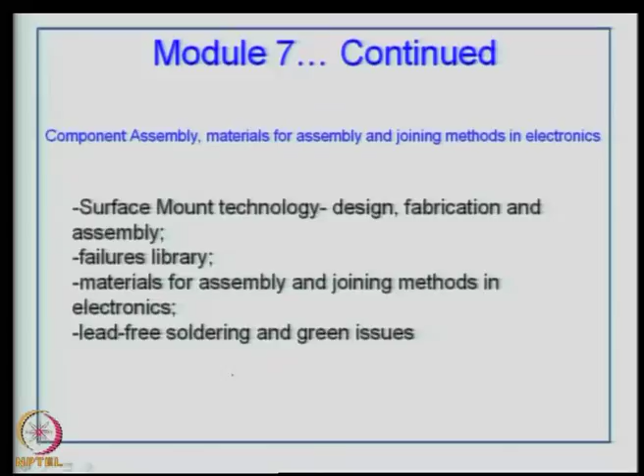So we will continue with module 7 of this electronic systems packaging course. As you are aware, in module 7 the focus is on component assembly. The component can be a through hole, a surface mount device, or an advanced package like a BGA, a CSP, or a flip chip.

Flip chip on board is considered a very advanced form of connection, although flip chip is in itself a first level interconnection choice. In this chapter, we are looking at materials used for assembly purposes. Typically, the focus is on solder alloy that is used for joining components on the board.

This becomes very important because joint failures have been seen in many design and assembly issues. The reason could be the joining material, that is the alloy, or the nature of the substrate, the nature of the component lead, whether it is a surface mount device or a through hole component, and so on. The failures could also be due to the soldering or joining conditions, whether it is manual or equipment based, machine based operations.

Remember, in this course we are trying to teach you how you can do these joining methods in your lab in a prototyping unit, but at the same time we are also looking at issues in terms of reliability, in terms of failures that can be seen in large volume production.

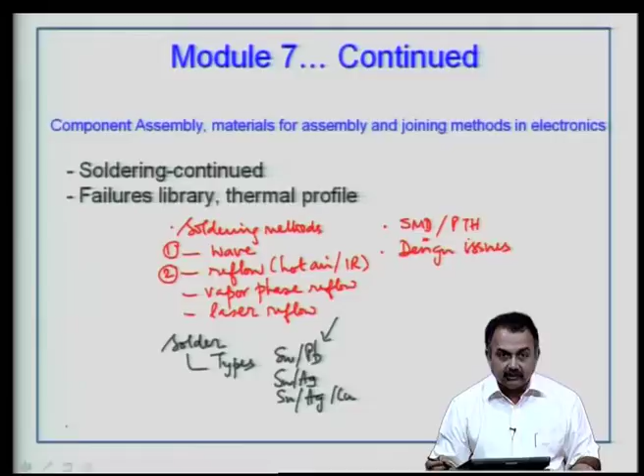Today we are going to talk about vapor phase reflow soldering process. This is a very good technique to avoid heat shocks. This could be considered as an alternative to IR reflow or hot air, that is convection based hot air reflow processes.

Now remember, I keep emphasizing in this particular module that when you do an assembly where you have a surface mount device that needs to be mounted on a substrate, you need to know the nature of the components that can experience heat shock, thermal shock during the assembly processes.

For that, you need to look into the data sheet of the component, and they would have specified that the component in some cases can experience a thermal shock, and therefore it is not recommended to expose that component above a particular temperature for a certain period of time. So that information needs to be gathered by the designer as well as implemented by the assembly personnel.

Now, in IR reflow or hot air reflow, the thermal profile has been set and you reach a peak temperature at which the solder melts, reflows, and then attaches itself to the component lead. Now in this scenario, there are various components on the board, and different components will experience different thermal shocks, because the materials for each of these components can be different.

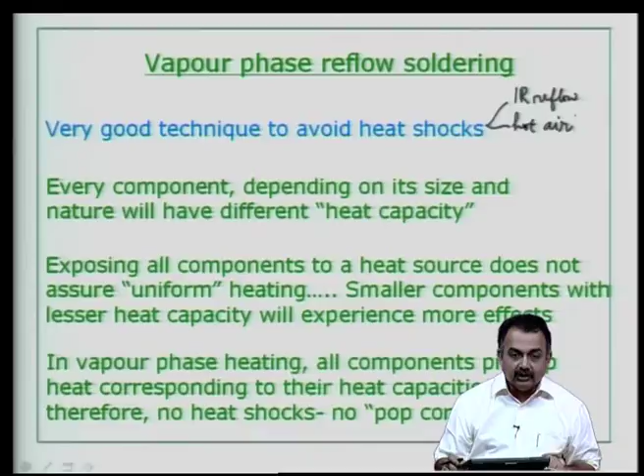Vapor phase reflow is a very good technique, because in vapor phase reflow soldering process, all the components pick up heat corresponding to their heat capacities, and therefore there are no heat shocks. This we call the popcorning effect, as you can see here, the term popcorning effect is used. Now what does a popcorning effect mean?

If you take a BGA component, for example, and if it is a plastic component, basically the plastic material used is epoxy, and epoxy is known to absorb some kind of moisture. Therefore, some manufacturers of packages generally recommend that you preheat the BGA package before it goes for assembly, to remove the moisture. What happens if you do not remove the moisture and if you expose it to reflow soldering?

For example, this is a BGA package. Now what I am drawing here is the solder ball, the ball grid array, and this is the substrate. Let us say this is an FR4 substrate, and then you have the die. So this is the cross section of a BGA package. Now there will be inherent moisture because of the nature of the epoxy material.

A sudden thermal shock means you do not expect that there is so much moisture entrapped. Now, if you set a wrong thermal profile, the moisture will evaporate or be removed from this area, that is the FR4 epoxy area, and then the solder ball area, there is entrapment of moisture. So this thermal profile will make this moisture burst out in the form of gases, and this will cause delamination.

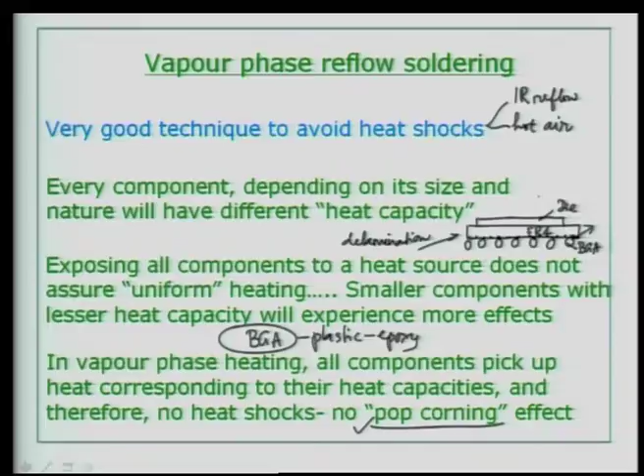So a popcorning effect means you can literally see it if you carefully observe through a video camera when you do a reflow soldering process in a package in which you are sure there is moisture. You can see the separation of the solder balls from the FR4 substrate. If you do not notice it, you will see failures, and you have to replace this package. Therefore, popcorning effect is an inherent problem in BGA soldering, especially in plastic packages. So based on the plastic material used, the encapsulant or the organic substrate, it is better to preheat and prepare this package for reflow soldering instead of directly using it from its normal storage position.

Now let us describe what is vapor phase soldering. It is used only for surface mount devices, and here typically, as you can see in this figure, there is a container, and then you have the organic solvent. Basically you are going to use an organic solvent. The organic solvent that is used is perfluoropolyether, PFPE.

Now the organic solvent will be heated at a particular temperature where it can boil, so that you get the vapors. You can see here these are the vapors. Now your board, which is picked and placed using a machine pick and place process using solder paste, so that it is tacky cured and the components are in place, is slowly introduced into the working chamber where the vapors are ready.

Now the vapors will be in contact with your printed circuit board, and based on the heat capacities of the components, sufficient heat will be absorbed by the components. For example, PFPE boils at 230 degrees centigrade. Now suppose you are using a solder alloy with a melting point of around 220 degrees centigrade, so you have a window of plus 10 degrees centigrade. The reflow process takes place and all your components are attached during this reflow process.

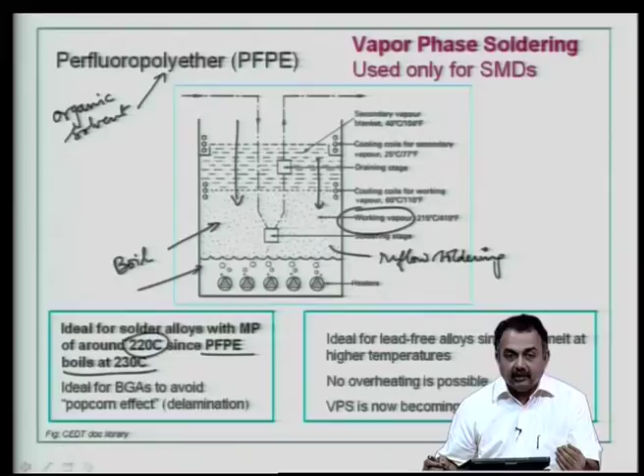So, you have a condenser that is usually present in this, so that it condenses quickly back and again it is heated, and therefore, you get a constant area, sufficient area that is available for the vapor to reflow the solder paste material and enable the reflow soldering process. This is very ideal for BGAs to avoid the popcorn effect.

So, the printed circuit board assembly process can be done for a few boards depending on the area of the chamber, and the reason why we say this is ideal for BGAs is because you can work at temperatures that are not detrimental to the substrate and the solder ball attachment.

Now, this process is ideal for lead free alloys, since they melt at higher temperatures. Therefore, you can fix the entire process at 230 C, and most lead free alloys have melting points around or less than 230 C, and therefore, you have a very ideal situation for working with lead free alloy solder paste.

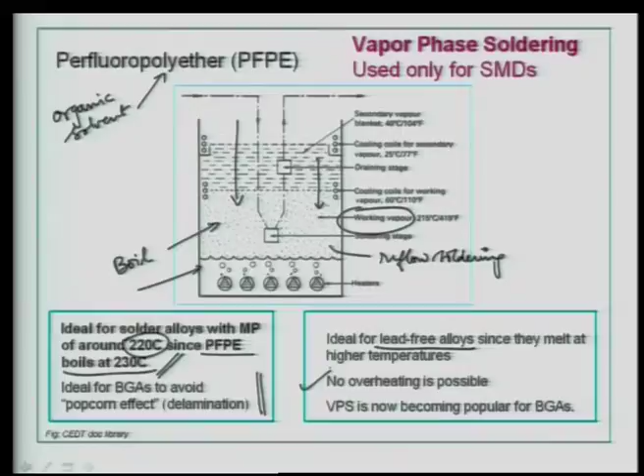Now, there is absolutely no issue of overheating, which is always possible with the IR or hot air reflow soldering process. That is why we have to work with the thermal profile, which we are going to discuss later today, how sometimes even with the best thermal profile you do not get a very good joint.

But vapor phase soldering is catching up very fast. It is being tried for mass production, and therefore, this is a very good alternative for IR or hot air. In fact, IR is much below in terms of choice compared to convection based hot air reflow soldering.

So, this is an ideal situation. This can be used for prototyping, and we are simply using the basic concept that various materials have different heat capacities, and that could be used for transferring heat from the vapor to the component and thereby to the lead and the solder paste to get a very good wet joint.

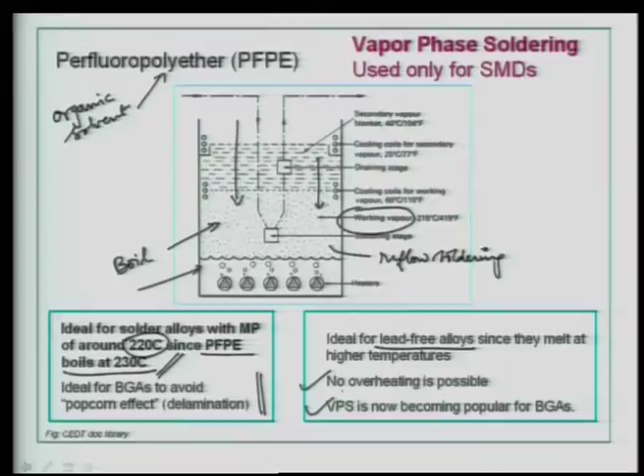Now, having seen all the reflow processes, let us look at an issue: whether we have to really clean the board after assembly. Is cleaning really necessary? Yes, because as we know, flux is being used in the solder paste. It is corrosive, and we have to use flux because we have seen the need for using flux.

A long term contact will lead to corrosion. Although flux is used to remove oxides and clean up the copper pads, residues of flux after the reflow process can lead to deposit of various byproducts, which in the long term will lead to corrosion at the joints. So, you can have joint failure caused by flux residues.

Therefore, you can clean the board after assembly. It is a major step because let's say after 1 year or 2 years, if the board is analyzed and there has been a problem due to shorting of tracks, or shorting of a track caused by debris due to flux and a nearby joint which is also affected due to formation of an electrochemical cell, these kind of issues can be expected if the board is not cleaned.

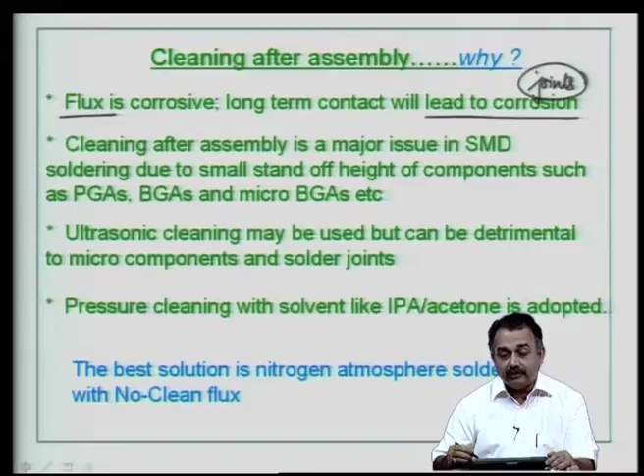So, cleaning after assembly is a major issue, and especially when you are using small standoff height components, that means low profile components, you can't really find out if there is a flux residue under the component, especially in a BGA. This is the board. So, you can expect, because this is a large area package, after reflow soldering you really do not know the kind of contamination that has taken place under the BGA package.

It could be even in the case of a surface mount chip capacitor. So, we are really concerned about contamination under the package.

Sometimes it is possible to easily remove the contaminants outside of the package area on the board. Ultrasonic cleaning can be used, but sometimes ultrasonic cleaning for a long time could be detrimental because it could affect the micro components, small components and the solder joints due to vibrational shock. Therefore, although this is a suggested method, people would love to use pressure cleaning with solvent like isopropyl alcohol or acetone. In fact, an IPA mixture with water is also adopted.

So, cleaning after assembly is crucial. The only question is how do you clean it so that your newly formed joints are not affected, especially by ultrasonic cleaning - there again the timing is very important. The best solution is working with nitrogen atmosphere. Many people have been using the reflow soldering process in nitrogen rather than in air. So, this could be considered as an option to air reflow.

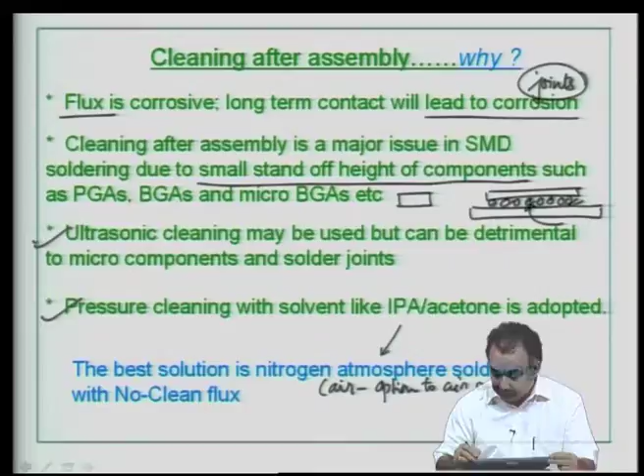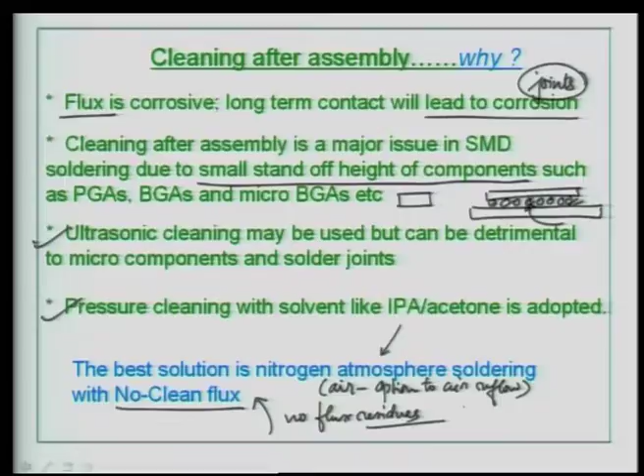And also using no clean flux. We have seen when we discussed flux materials that there is a material known as no clean flux. If you look at the data sheet of no clean flux, it says that if you operate the reflow process at a certain temperature, it is guaranteed that there will be no flux residues. So typically you do not have to clean the board at all when you use a no clean flux, but no clean flux could be expensive.

Now we look at some design for manufacturing issues. Having seen all the processes, these couple of points that I am going to discuss could go a long way in increasing the yield in large volume manufacturing.

For example, if you are mounting surface mount devices, and if you have the components placed at random, like this in one direction and this in another direction, the placement machines will lose speed if you work with different angles. So it is better to maintain either this state or this state, depending on the population of smaller or larger components on the board. It also helps in testing and assembly, because you can expect tall components' shadow not affecting the smaller components. So the longitudinal axis of all components should either be parallel or perpendicular. This is a design issue.

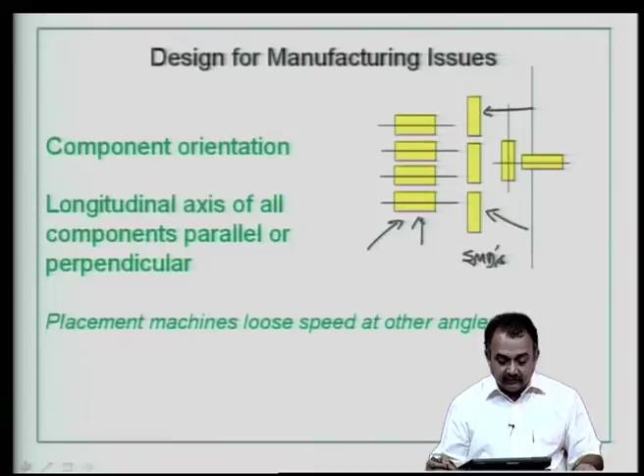Now, if you look at clearance between components, again we are talking about placement machine clearance. In some cases, the placement machines hold components either by vacuum pens or claws, and that requires a lot of space, especially for a tall component. Therefore you have to give a gap between tall components, and it is not advisable to place any components in that gap. So look at the kind of equipment you have, look at the type of component you are using, and look at what clearance you can give between components.

So that repair and rework can also be easily done. There could be situations when you want to remove a component, and you will have to use special vacuum tools to pull out the component and heat only that particular component for desoldering. So therefore, give a clearance of, say, 100 mils minimum, and it becomes easy for placing or for repairing and desoldering.

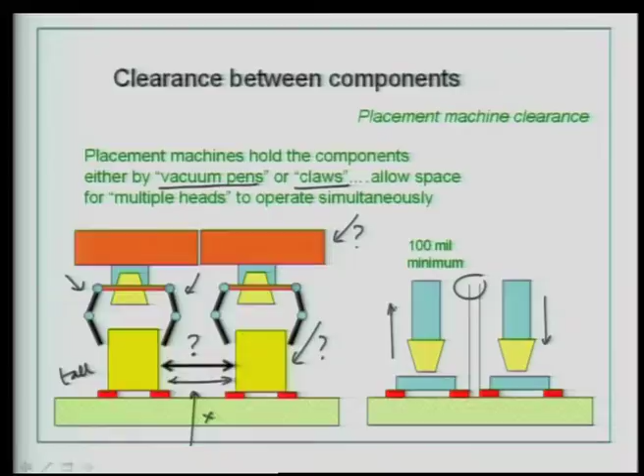There are a couple of points again that we will discuss before we go further. Considerations as a designer for good soldering: good clearance between the footprints. Now this is a footprint of one device, this is another one. Now you look at the distance between the two. Is it sufficient for a package like this?

Look at the placement. Assume this is placed at the center of the footprint initially. Now, after reflow, if the solder paste volume is going to be larger than required, you can expect, because of the large pad area that you have provided, the component can swim closer to the next component, resulting in a short. So look at footprint size, that is, footprint area calculation is very important.

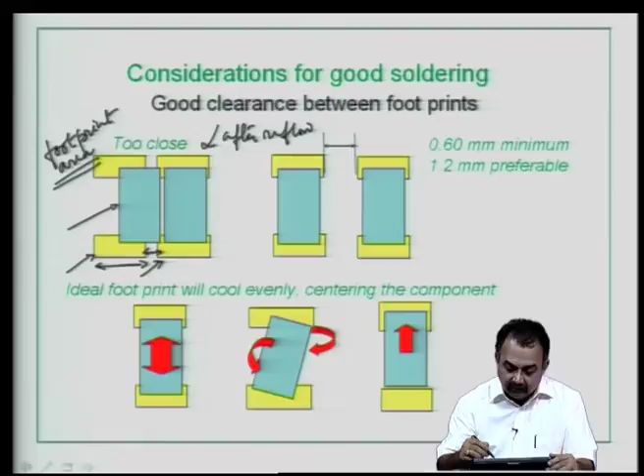Do not use footprints that are available in the library for all types of devices, that is, your chip capacitors. You can modify or edit the component footprint and reduce the size if required for a particular component of your choice. Now similarly, this distance, that is the width, is also very important. You do not want the component to move away from this pad, and sometimes the situation is that the component can swim to one side, resulting in no contact on the other side. So clearances between footprints are very important, and the area of the footprint is very important.

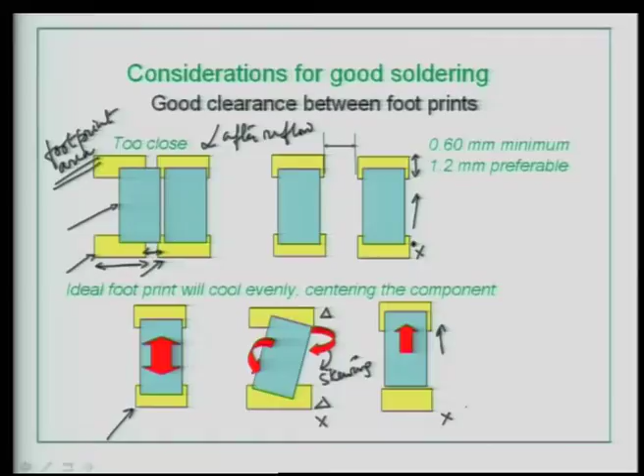Ideal footprint will cool evenly when you do the reflow, centering the component. Although we expect self alignment due to surface tension of the solder alloy, yet this is an ideal case. In some cases, if the solder paste is too much or if the temperatures are uneven, then you can expect this kind of skewing effect, or as I said, it could move to one side. So these are situations that you really want to avoid during reflow soldering of chip capacitors or chip resistors. These are all very small points that you can implement at your design stage itself.

Now, as a summary, we will look at writing down the soldering steps for a BGA. We have seen the various process mechanisms by which you can attach a BGA. So I will just list the typical BGA soldering steps. First, pre-bake the component if required, to remove the moisture. The reason is you want to avoid the popcorning effect.

Dispense the solder paste on the PCB footprints. In some cases, no solder paste is used, and the BGA solder balls reflow and join to the substrate directly. In this case, you must have equipment that can hold the BGA in place. If you do not have such equipment, you should use a small volume of solder paste, which contains an adhesive that can hold your BGA until it goes into the reflow oven. So, these are the two important steps.

Now you place the BGA package and align it carefully using some kind of fiducial on the board, or if you have equipment, your CAD data can help.

Now, at room temperature, you can tacky cure if you have used solder paste. This is recommended because your glue will now hold to the BGA solder balls.

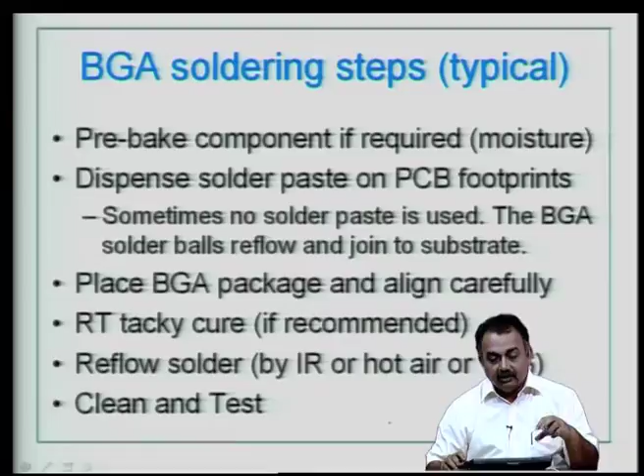Now, there is always a possibility that a BGA can be defective. If you look at the X-ray after the attachment process of a BGA is over, you could see that some of the solder joints have not been attached. There could be a dry solder joint, or there could be flux or solder paste in excess on certain sites under the BGA, which could result in shorting.

So, when you have such a situation, you might have to rework, that is, pull out the BGA, desolder it, and attach a new BGA after repairing the board as well as the BGA backside, that is the solder ball side. This is known as repair and rework. So, let us see how this is done.

The first thing is to apply liquid solder flux on the sides of the package. Imagine a BGA flip chip on one side, and on the other side you have the solder balls which have been removed.

Now, how do you remove the solder balls? You can apply hot air and use vacuum to remove the material, then clean up the area with isopropyl alcohol or acetone to keep it free from residues from the previous grid that you had.

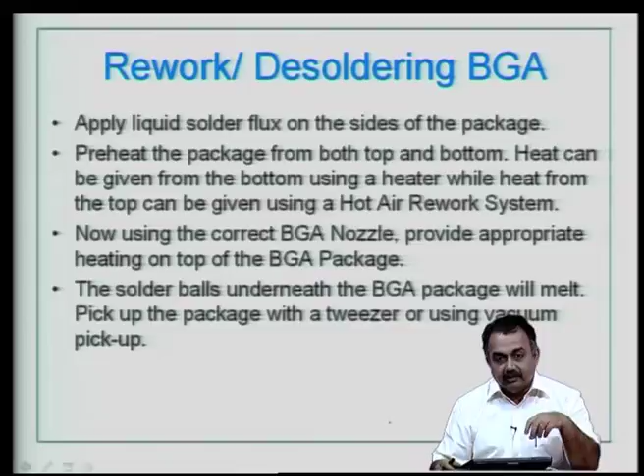Now, using the correct BGA nozzle, provide appropriate heating on top of the BGA package, because you do not want to affect the other areas. The solder balls underneath the BGA package will melt. Now, pick the package with a tweezer or using a vacuum pickup.

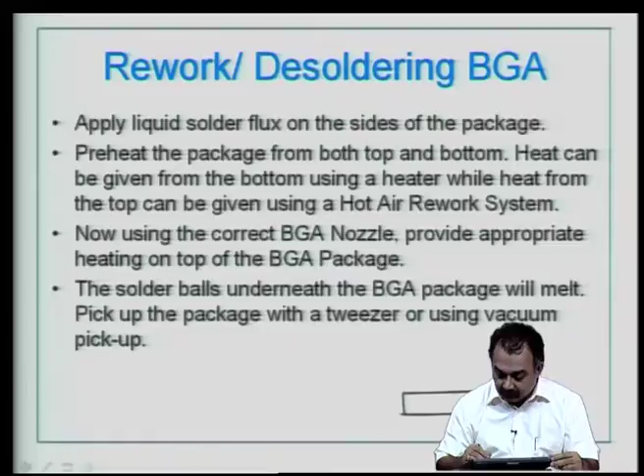Now, this applies to both. Suppose there is a board and there is a BGA package. So this is the BGA package, this is your FR4. Now, this is to be repaired. So what basically you can do is apply a hot air nozzle around the BGA package, on top of the BGA package totally, and then remove it.

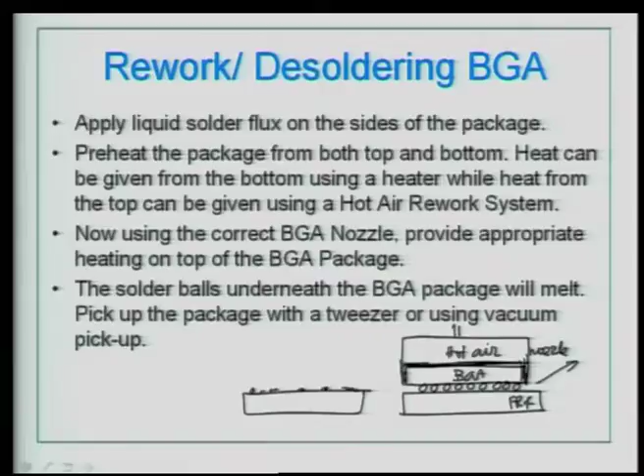So, when you remove it, what you get is on the PCB, those pads will be having some debris of the solder ball, and the BGA package, if I show you the top side, will also be non-uniform, because you have tried to remove the BGA from the board. So now you have to repair the BGA, you also have to repair the board bonding sites, and only then can you go for a new reballing process.

This is a task that everybody working in hardware, board design and assembly needs to be aware of today, because we are using a lot of BGAs. I will now show you a video about BGA ball desoldering. This has been done at the CEDT packaging lab, and I will explain the process steps as we go.

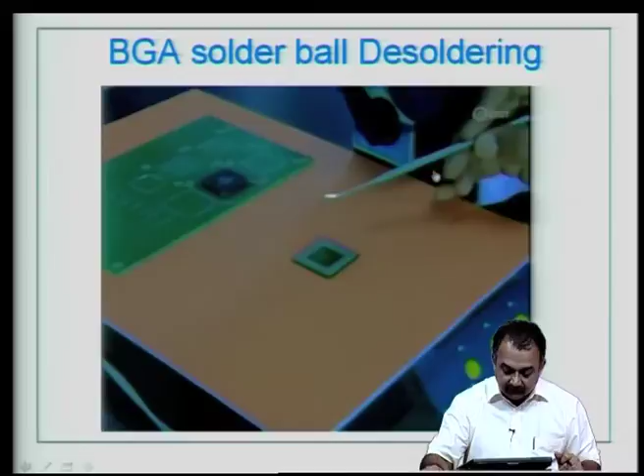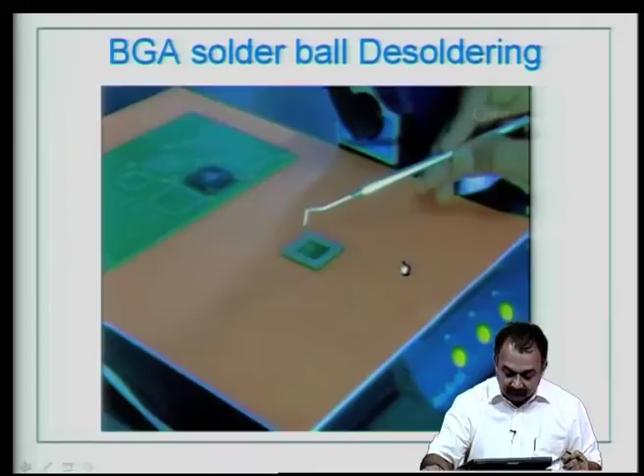What you are seeing is a BGA package. Now assume there are a few bad interconnects and you want to pull out the solder balls from those areas. We will now show you how to remove the defective solder balls, but in this video, irrespective of whether it is defective or not, we are going to remove all the solder balls, assuming there are a lot of defects.

So basically what we are trying to do is hold the BGA package firmly on a frame. Now there is a hot air nozzle. You apply hot air at appropriate temperatures suitable for the FR4 substrate, to melt the solder alloy you are using, so you need knowledge of that. Then you have the vacuum pickup of the molten solder.

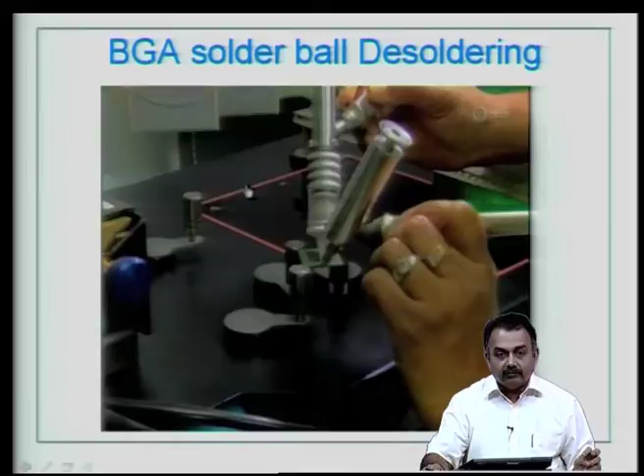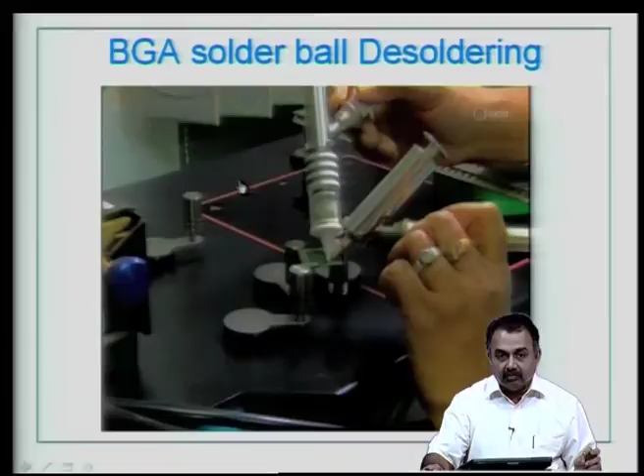So what you are seeing now is hot air being blown, and simultaneously we quickly remove the molten solder by a vacuum syringe technique. In this way, very carefully, without affecting the board surface, you remove the solder balls from the entire area you need to rework.

Now remember, in a BGA you can work on smaller areas. You need not remove everything unless all the BGA balls are damaged. In that case, you have to remove the entire solder ball.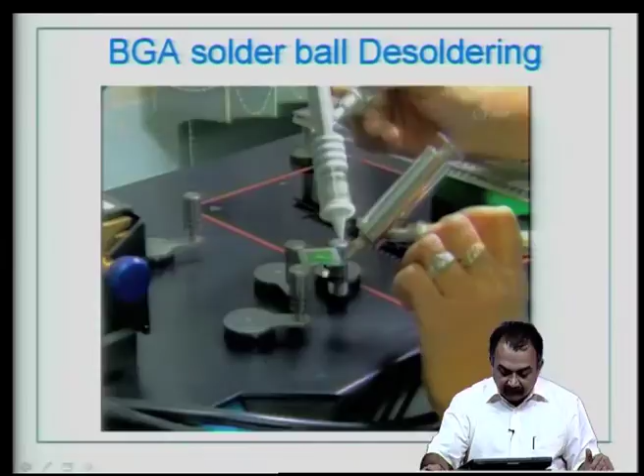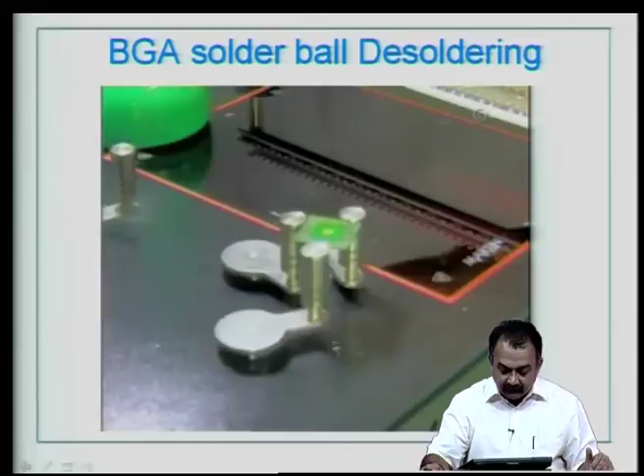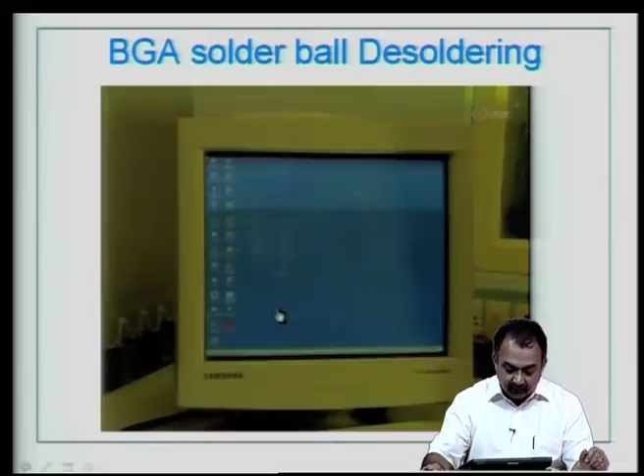So you can see these areas have been removed of the solder ball, and what you are seeing is the exposed pad on the printed circuit board. Now you can see the entire BGA surface has been removed of the solder ball. This is the best technique - you have to do it manually if you want good performance, and to make sure your substrate is not affected. You can use the same chip after reballing the package with new solder balls.

Currently, for this technique there is no typical automation, because you want to carefully look at every package for the desoldering and the reballing process.

Now let us look at how we do a BGA reballing. Once the balls from the BGA package are removed, clean the pad, as I said before, with appropriate solvent, and remove excess solder from the board. So your package is cleaned and your board is also cleaned.

Now apply flux paste or cream onto the pad. Paste or cream flux will help solder balls stick, instead of using a thin flux liquid, so that they do not fall or change position when the solder balls are attached.

Place the new solder balls very carefully on the pad using some kind of stencil that matches the ball diameter you intended to have. That information is very crucial - you can't use any ball size. You must have an idea of what the original ball size was, because you are working on a definite pitch, and different ball diameters will affect the pitch of the component.

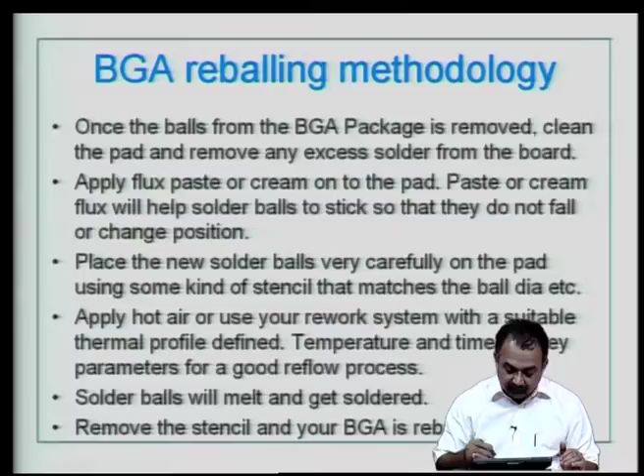So temperature and time are very important here. For a good reflow process, you have to work on these issues. Again, temperature, time, knowledge of the solder material, and knowledge of the substrate - that is, the glass transition of the substrate - are all essential information.

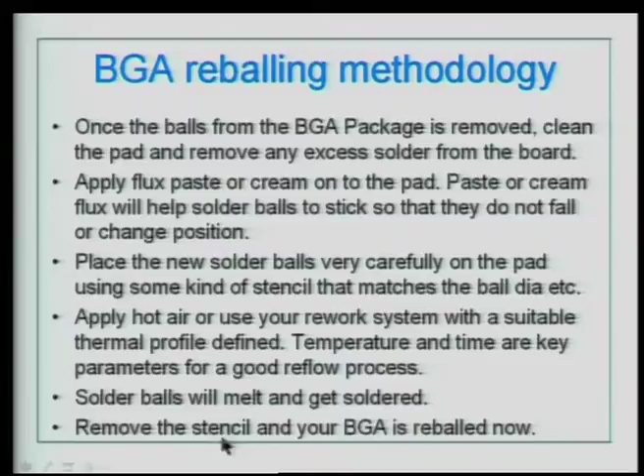Solder balls will melt and get soldered, and now you remove the stencil and your BGA is reballed. So let us look at how a reballing is done.

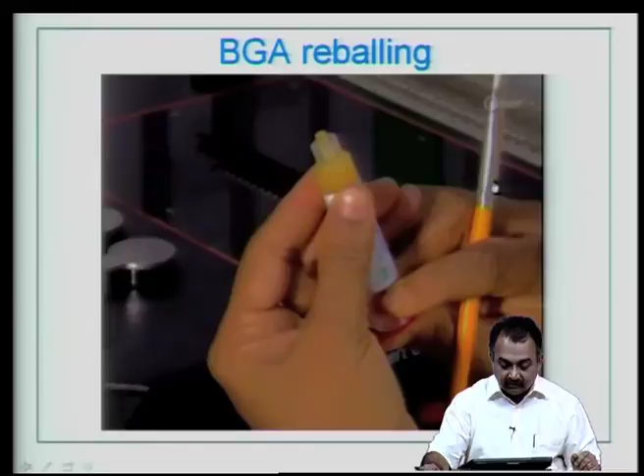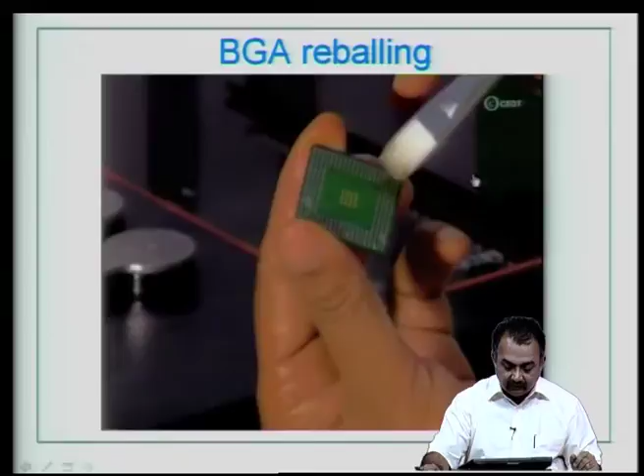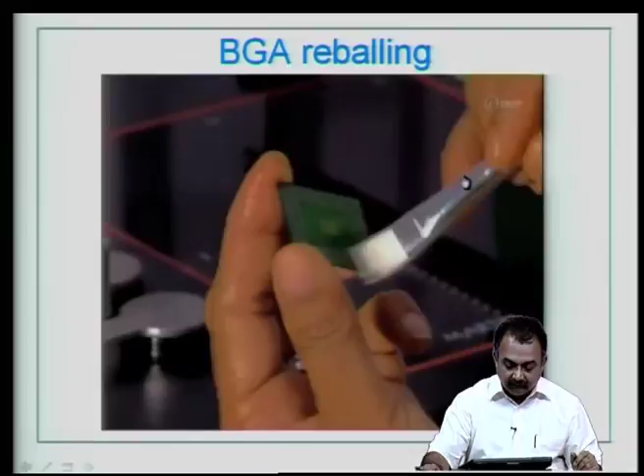Now let us see how reballing is done for the package that was desoldered. First, use a flux cream that is somewhat consistent and tacky. Using a brush, apply the cream onto the cleaned areas of the BGA package where the old solder balls were removed. This should be a very thin layer, sufficient to act as a flux and also as an adhesive for the BGA.

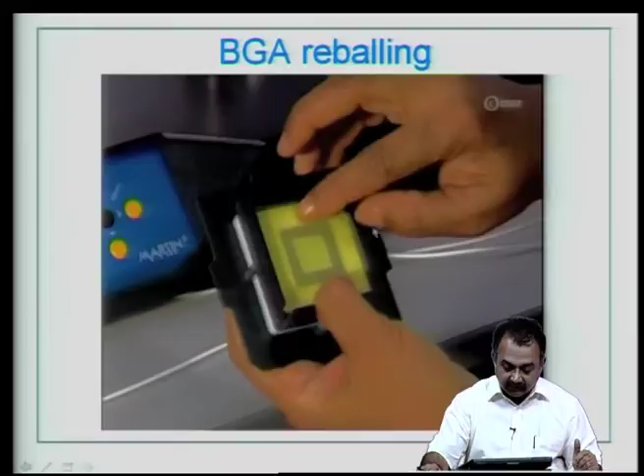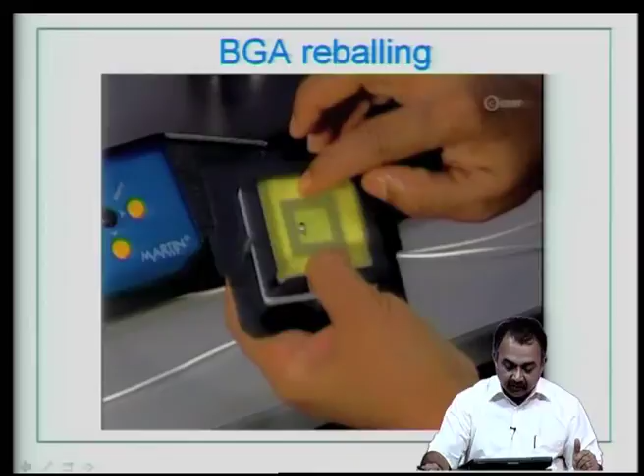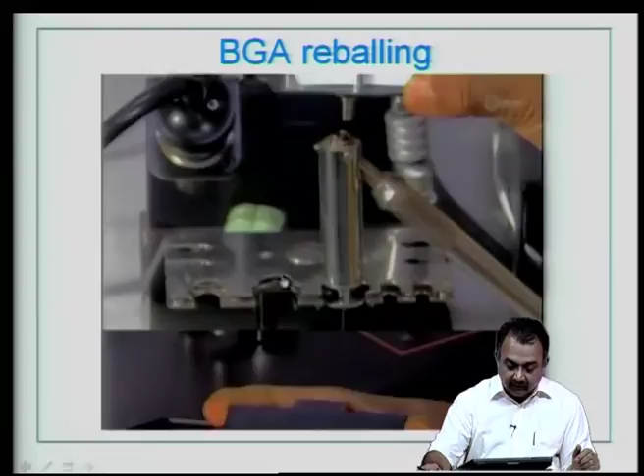Now you are placing the BGA and the template. You can see in this holder you are placing the BGA substrate as well as the stencil. The stencil contains holes pertaining to the BGA matrix of the right dimensions. Once done, you can see the exposed pad area. The next job is to apply vacuum and keep it in place. This helps the BGA balls flow into place.

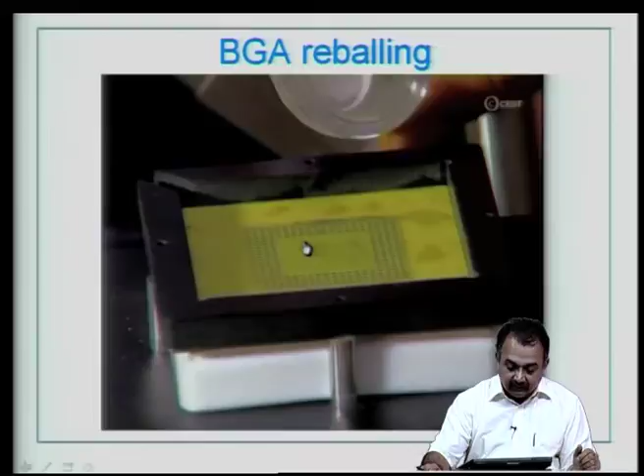Now we are seeing new solder balls of the same quality and diameter being poured onto the stencil area, and you can see the entire matrix is now ready with new solder balls.

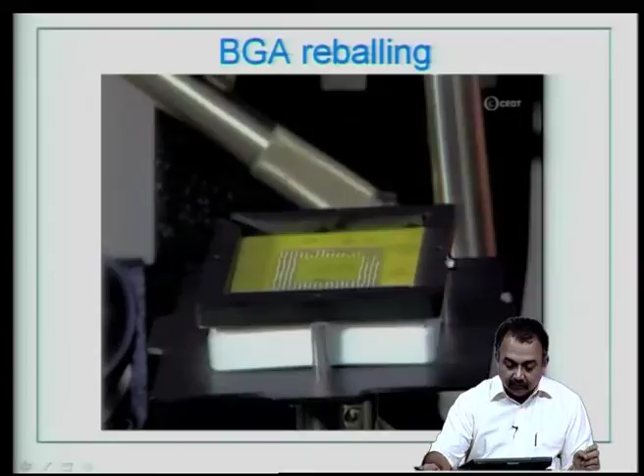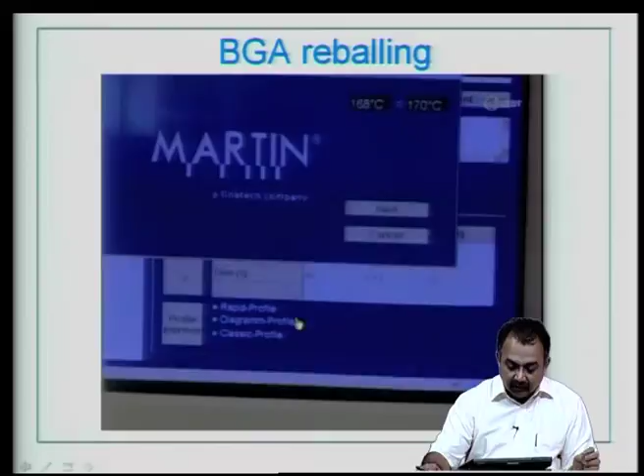Now you are closing the lid. This is a stainless steel material that can withstand higher temperatures and protect your BGA substrate. Now use any equipment you are working with that can set a thermal profile from room temperature to the peak reflow temperature, say 220 or 230 degrees centigrade, depending on the alloy.

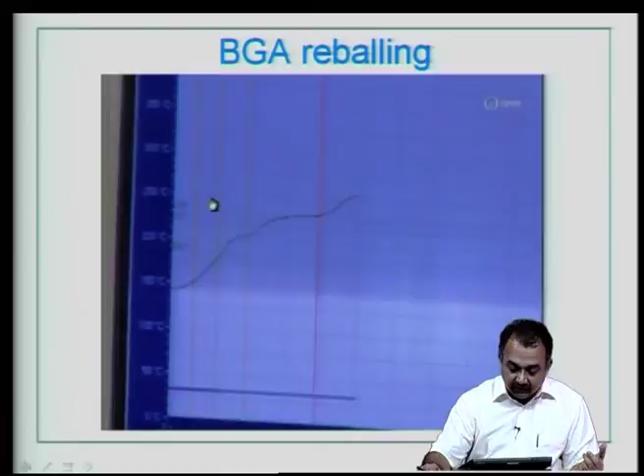So you have to gradually heat it up. You can't set it at higher heating rates. You can see a thermal profile here: very slow heating, then reaching the peak reflow temperature. Once that's done, it is slowly cooled back to room temperature.

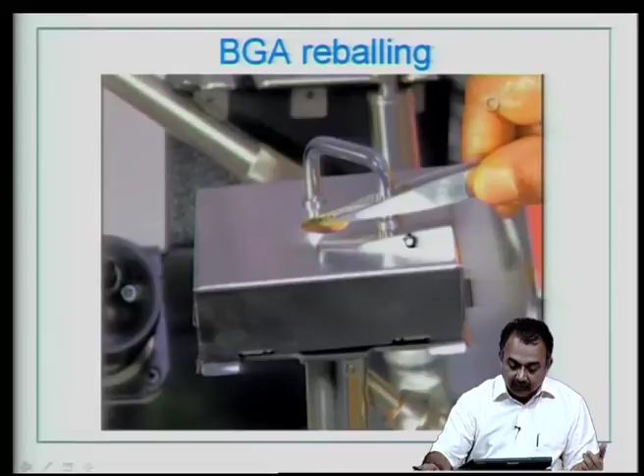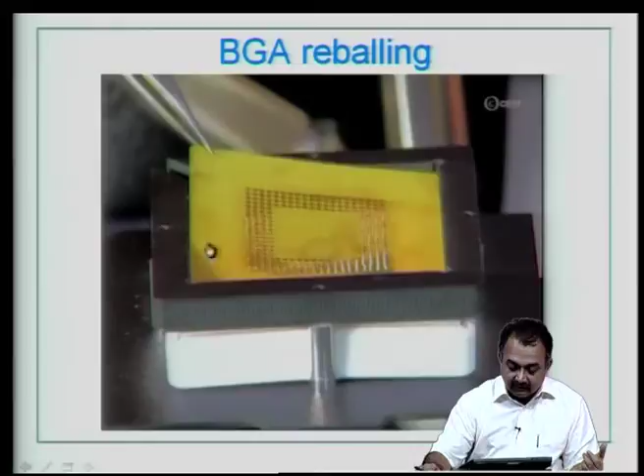Now you can lift the cover or lid, and you can see the BGA has been reflowed. Now you can remove the stencil that was used. The stencil is not affected by these temperatures; it is basically a pure dielectric epoxy glass.

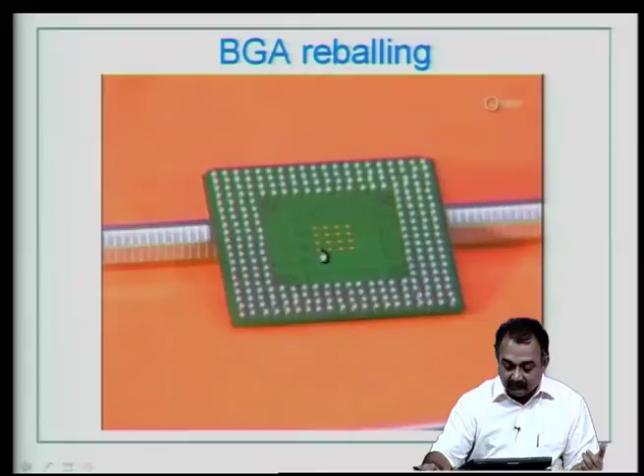Now you can see a wonderfully done BGA reballing. The quality is excellent, with no defective solder balls. You have used the right temperature and timing to reball this package. This package is not wasted; you can reuse it.

So this is a very good demonstration of how a BGA can be reballed. Now this BGA is ready for soldering. We will now see how this BGA is soldered onto the board, that is, the package to board interconnection.

So what you are seeing here is the board, with provision for other components. This BGA package which you have repaired is now vacuum picked and is being aligned onto the footprint on the board. Make sure you have some mechanism, some fiducial on the board, to align this BGA onto the board.

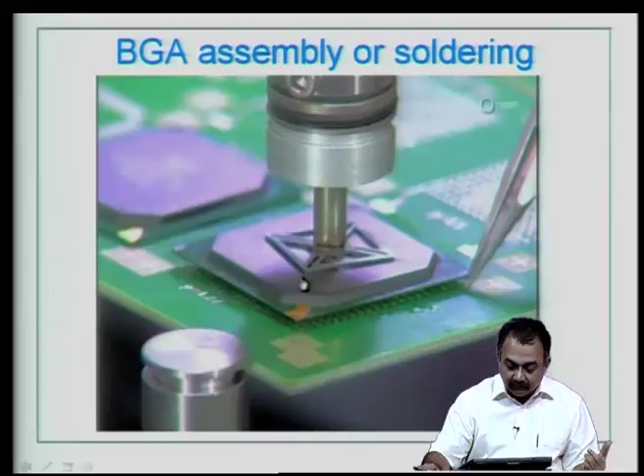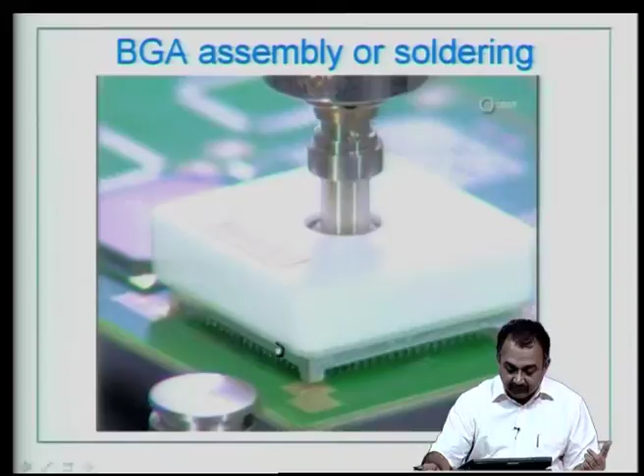Now you can set the reflow thermal profile for this particular board. You can see there is a nozzle being specially utilized for this BGA package, meaning hot air is specifically targeted around it. You can get different nozzles for different sizes.

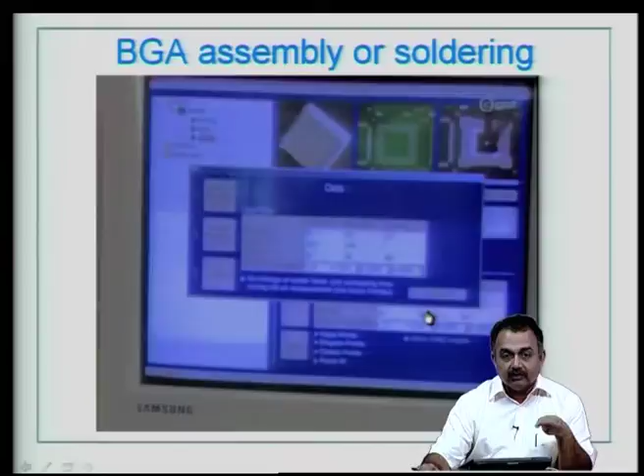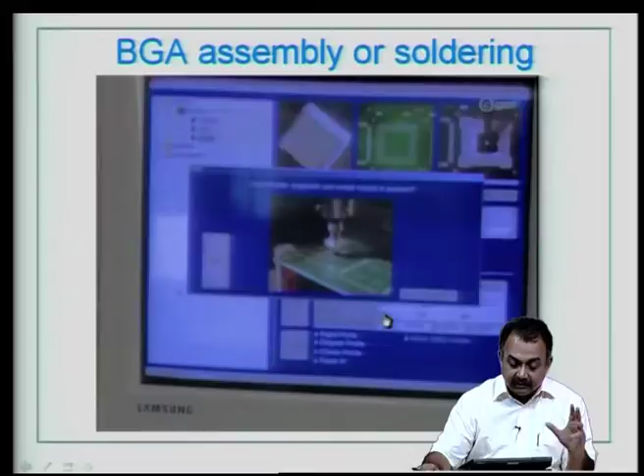Now the thermal profile heating has started. There is preheating first, then a soak zone where the entire system soaks so that all the components of the solder paste, if you're using one, are removed, and then it finally reaches peak reflow. The situations differ when you use a reflow paste, solder paste, or no solder paste. In any case, this equipment has IR heating from the bottom.

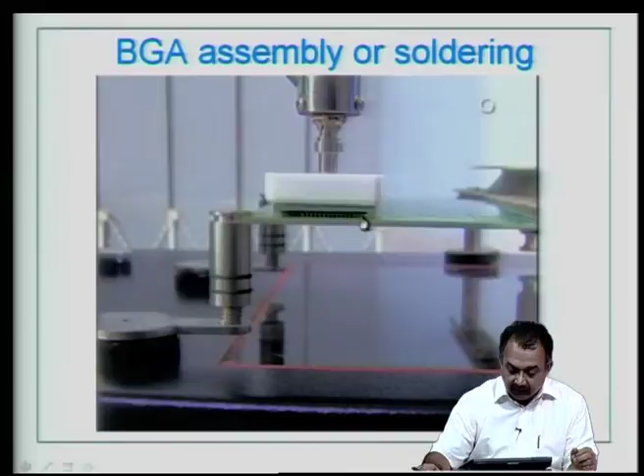So use a thermal profile that suits your BGA package, and you can see very nice solder ball connections made onto the board. Now you can remove the nozzle and your BGA connection to the board is ready.

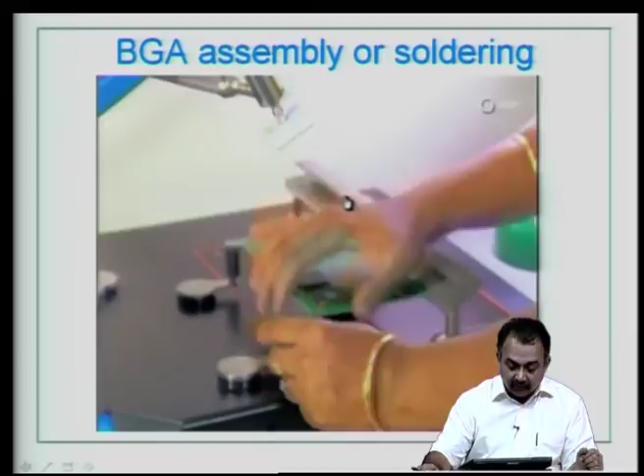So everything works with slow cooling. You can't do a sudden cooling, because solder joint reliability depends on the right reflow temperature as well as slow cooling. Solder joint failure is dependent on these qualities of the reflow process. So we have seen these three videos where we saw desoldering, then reballing, and then the soldering process.

Now, whatever be it, even if you do a good reflow process or a wave soldering process or a vapor phase process, you might end up seeing some defects. Defects cannot be ignored, and defects are possible even with the best equipment and process. So we have to watch out for defects. That is why quality control in assembly becomes very important. Some of the defects that we can see, I am going to talk about reflow soldering especially.

Spattering means spreading of the solder balls, especially the solder balls on the board after the reflow process is over. This can be due to various reasons. You can see micro solder balls spread all over the board in some cases due to wrong temperatures, due to poor quality of the solder paste, too much solvent in the solder paste, and also poor binder in the solder paste.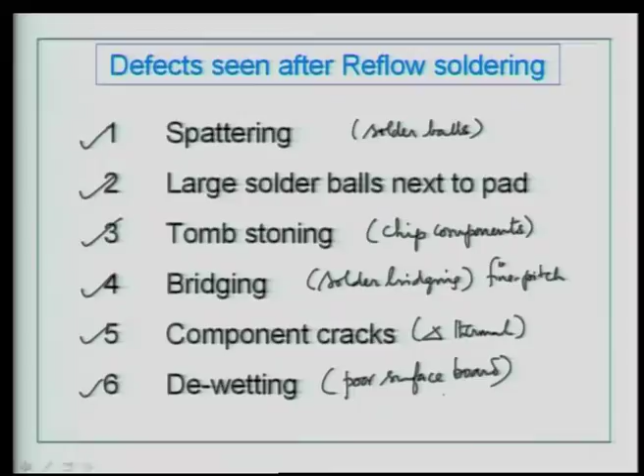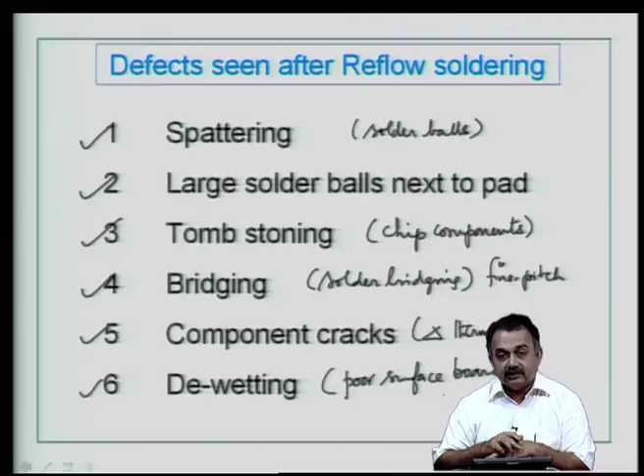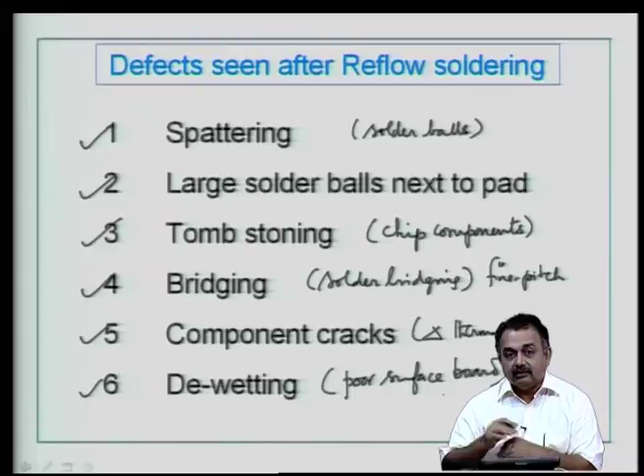So these are the issues or defects that one can see. There could be defects that you can actually notice at the solder joints. It could be a dry joint, it could be a voiding, it could be a trapped bubble or air or moisture leading to a void. So those can lead to joint failures over time. We have to carefully look for high quality processes. Defects, if any, have to be rectified and we have to zero in or troubleshoot where exactly in the process line the reason for the defects, the process which has caused the defect.

So we will now look at failures library. I will show a series of slides which could be typical cases of defects that can be seen after the reflow soldering process.

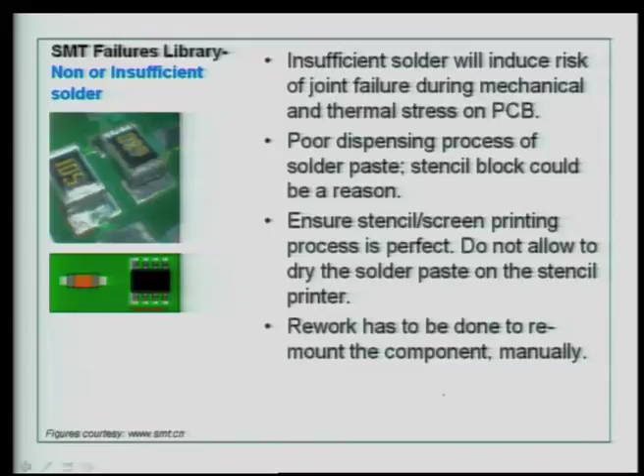The first one is known as non or insufficient solder. Obviously, when you say no solder or insufficient solder, that means there is no proper electrical connection. As you can see from this figure, in this case there is insufficient solder, maybe on one side of the terminal, but this is a very good joint, but the adjacent one has got problems. So what are the issues with this? Insufficient solder will induce risk of joint failure because of low volume of solder during mechanical and thermal stress loads on the PCB. So if you notice this, you can better remove the chip component and do a manual soldering process.

So what is the reason for this? Poor dispensing process of the solder paste. That means, in that particular area there is a stencil block. The stencil that you have used is blocked, the area needs to be cleaned, and if you repeat this and get the same defect, and if you have seen this for example in 50 boards, then definitely the stencil needs to be re-cleaned and reworked, so that you can start afresh the printing process. That is why when you dispense the solder paste by syringe or stencil, before the components are placed, you need to have a look at the printing quality, because that will give an indication of how much volume the solder paste has been dispensed.

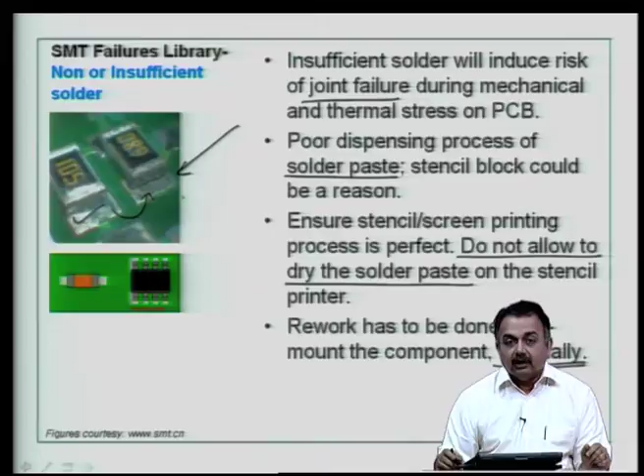Ensure the stencil printing process is perfect. Do not allow the solder paste to dry on the stencil printer for a long time. Use small volumes, finish off the printing and then mix a new paste or material. If there is a drying up on the screen or on the PCB before reflow, then you have problems. In manufacturing, they take care of these kind of issues. Rework has to be done to remount the component manually, because there may be just one or two such defects on a PCB normally.

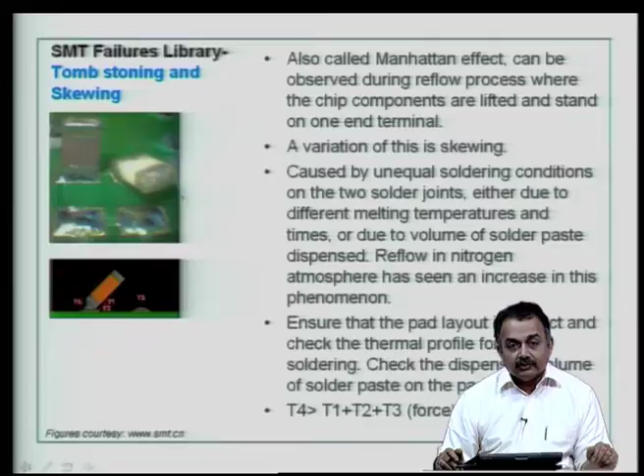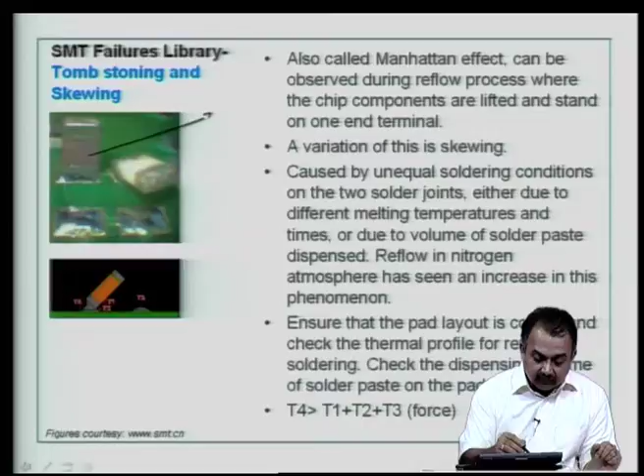The next failure we are going to see is tombstoning and skewing. Here what you see in this particular case is tombstoning, and this is skewing. It is also called the Manhattan effect, and can be observed during the reflow process, where the chip components are lifted and stand on one end terminal.

There are a couple of video clips available on the web which you can try to find out and see how exactly this happens. Very interesting situation, and a variation of this tombstoning is known as skewing. Here the component does not lift completely to one side, whereas here it stands upright like a tombstone, therefore it is known as a tombstoning effect. The other one basically lifts and slides to one side. Both are defects and you have to repair it.

How is it caused? It is caused by unequal soldering conditions on the two solder joints. Although the joints are too close to each other, the condition here could be different compared to the condition on the other joint. The solder paste, when dispensed on both sides, could be unequal. The temperature that each of the terminals attain during reflow could be different. The atmosphere during reflow, whether it is nitrogen or air, could be a reason for these defects. Ensure that the pad layout is correct, so that there is sufficient drag of the solder. Check the thermal profile heating, make sure the spacing between components is okay so that they get equal thermal energy during heating, and check the dispensing volume of the solder paste when you print.

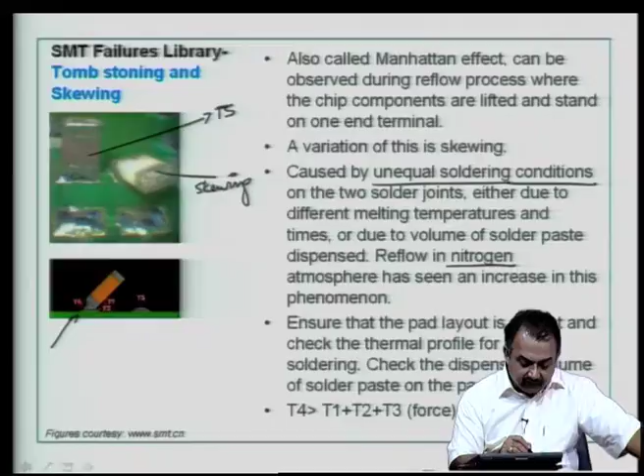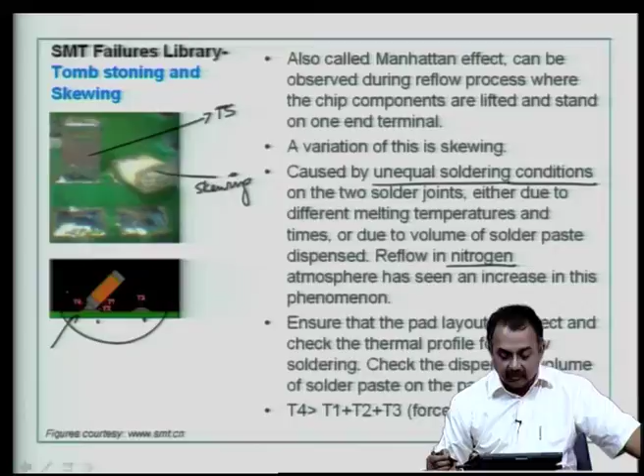Essentially, this tombstoning and skewing happens because the force at this terminal is larger than the force exhibited by the component on either of the terminals and at the center. So T4 here is greater than T1 plus T2 plus T3, the individual forces at different sides of the assembly of a particular component. These are situations which can be rectified to eliminate skewing and tombstoning.

The third defect is excess solder, which means there is too much solder alloy than required for a particular joint, because the size of the package is very small. You do not require too much solder, but at the same time you can't have deficient solder either. This condition can be detrimental to the board, because it causes mechanical stress on the component from too much solder, and it can heat up the component and cause stress on the component material as well.

So study the pad layout and use suitable pad sizes. It is seen mostly in wave soldering processes, because the solder drag is excessive on one side, which means your copper pad area is larger. So you have to avoid this. You can see in this picture how the solder drag or too much solder makes the component shift from its base. We have seen the design issue regarding this, and it ends up in a short.

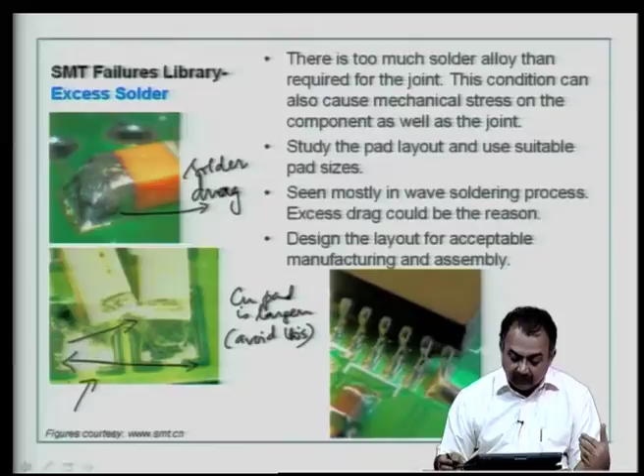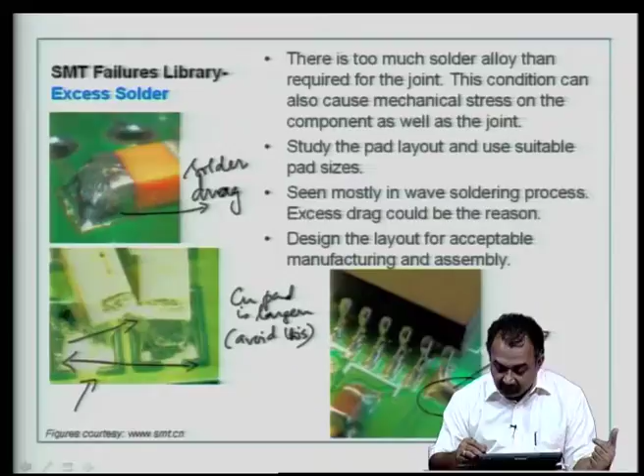So you have to repair both these components manually. Now excess drag is an important issue during wave soldering. Design the layout for acceptable manufacturing and assembly. For example, you can see here, this is a QFP assembly which has undergone wave soldering, but the designer has taken care of this by having what is known as a robber pad. What it does is, during the wave soldering process, there is a drag of the wave, but at the end terminal there is an extra pad provided which accumulates all the solder material, and it avoids solder bridging in any of these areas. So this is a design issue that can be effectively utilized.

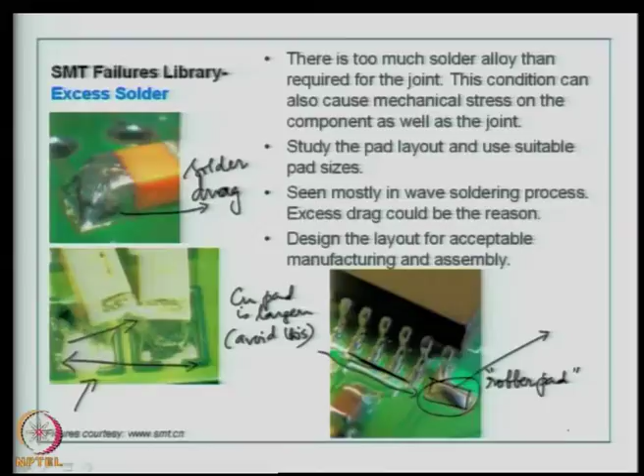So we will see such defects in the next class. We have seen three defects today: one is no solder, one is excess solder, and the other is tombstoning and skewing. I will review this chapter in the next class again, and then we will look at more defects. We will also look at lead free alloys, and towards the end in this module we will look at green issues for packaging.